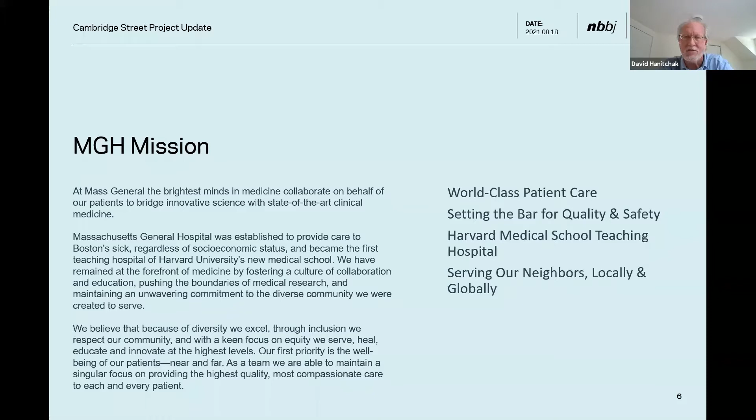MGH's mission is focused on clinical care, community care, research and teaching. We have a set of principles we follow, again focused on patients: how do we provide care, how do we use the building not just for specific occupants but to change care across the institution. Flexibility and adaptability are of key importance now that we are suddenly in a different respiratory disease type of world, and I can mention how some of our changes adapt to that. How do we improve the experience for our staff, and how do we try out new technologies? We also have to make it fiscally responsible, and I will touch on that as well.

The building planning started at least five years ago, though I've come across documents from 2013 suggesting we were thinking about it then, to deliver state-of-the-art care. We have increasing demand for care, and at the same time real capacity issues, particularly in the emergency department where we have frequent boarders. One reason is that we have 38% single beds in the hospital, and we are closing 30 to 60 head wall beds per day based on infection, gender, behavior, hospice, and any number of things. Plus we are working in some obsolete buildings providing care, and all of that needs to be upgraded.

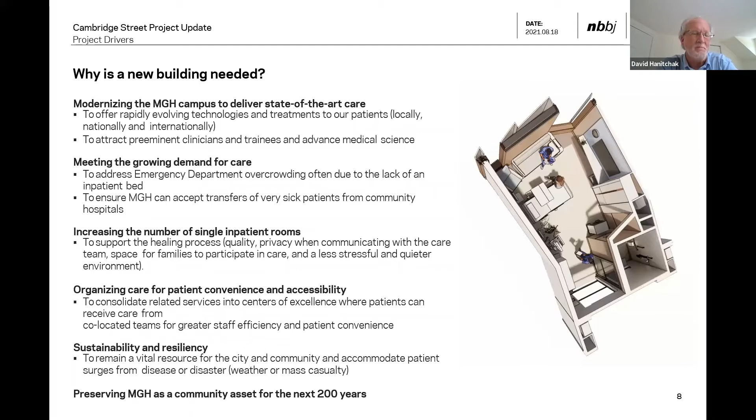More specifically, you can see our site on the left and an image encircled on the right. There are basically 2 blocks of a podium that I will describe in a moment, with 2 bed towers on top of that.

The buildings will be phased because we need to keep existing hospital operations ongoing. The site is right on Cambridge Street, if you know Boston, surrounded by North Grove, the main entry to the hospital, Parkman that runs along the north side, towards the upper left, and Blossom Street.

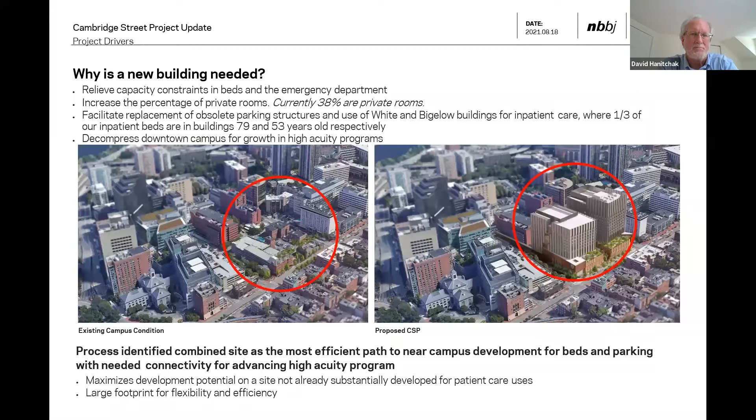So included in the building are 482 beds. That's a net new of 94, but the actual opportunity to not have to close 30 to 60 beds per day makes this more significant than it looks.

14 imaging modalities, 24 ORs, 120 exam rooms for cancer, plus 100 infusion bays.

We have full support services because the intent is that this building will be a place of refuge for the hospital if we are in a full disaster. It is set up to maintain 96 hours in island mode, and yet still be able to provide services both to the existing patients and any emergent patients that can make it to us at those times.

We also have a variety of needs that are directed by the city, including an MBTA head house for a planned Bowdoin Street to Charles Circle connector between 2 subway lines here.

We have 900 plus parking spaces, of which 175 are new. We are more than doubling our existing bike parking, and a variety of other services, both community, urban design, and hospital-based.

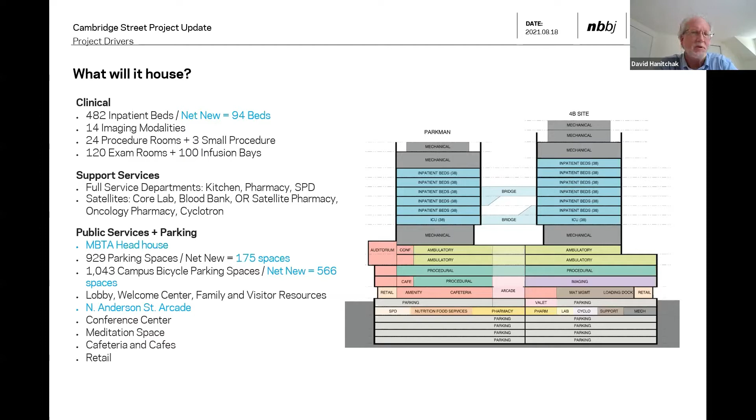And over the last several years that this project has been developed, we've had to slow up a bit. Part of the reason for that was COVID, and part of that was discussions with the community. We needed to consider what we would change based on what we've learned about the diseases we're likely to face in the future.

Given a variety of movements and the disease itself, what can we do with our commitment to public health equity and climate justice? And then how does that relate to resiliency and sustainability?

We have had a significant amount of dialogue with the community, state officials, neighborhood organizations. These are but some of the major ones. And frankly, everybody has a set of perfectly valid needs that we are trying to address.

Which brings us into one of our major challenges: how do we balance the goals and resources? I'll start by saying, obviously, we have the clinical drivers for the process and the severe capacity constraints.

We're replacing obsolete facilities, and we use this building to decompress programs currently within the hospital and to rationalize them so that they can expand the acute services within the hospital. At the same time, we are moving programs that can legitimately move off campus into neighborhoods, through other programs and other developments within our system.

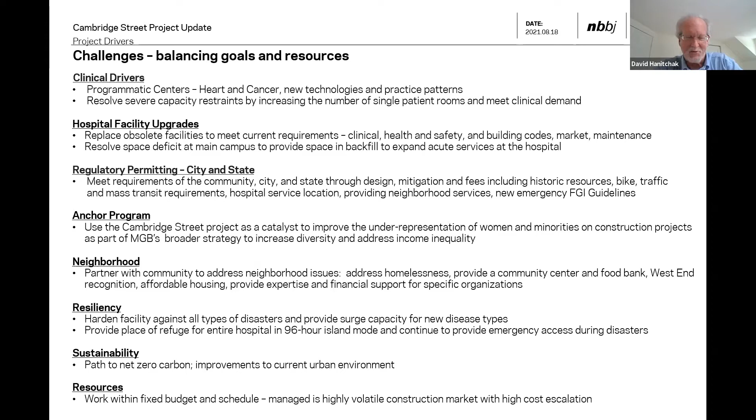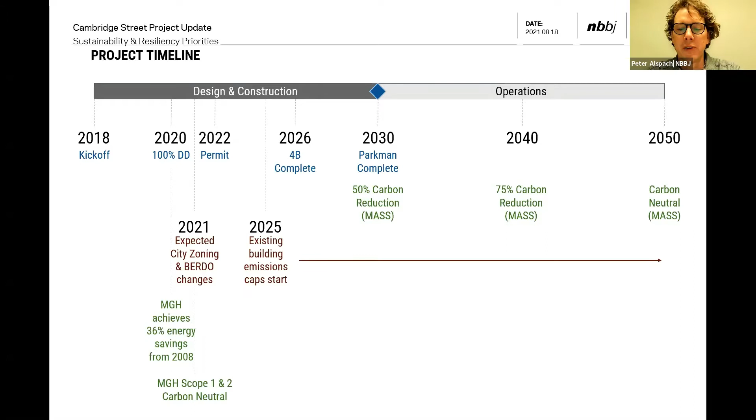So we wanted to talk about some of the sustainability and resiliency priorities first, and then we'll get into some of the more details around each of those topics.

I think one of the starting points for me is to look at the length of the project design and construction duration, as well as the expected length of the project's lifespan. I think that both of those have a significant influence on the drivers for the project and how we go about the process, especially around sustainability. We've got a 12+ year planning, design and construction process, and things change during that, and that is something we've had to be fairly nimble about, even during the design phase, looking forward out to 2030 and beyond, to make sure that our sustainability and resiliency goals for the project align with the kind of changing landscape, both regulatory and legislative, as well as the changing climate that is being projected out into the future.

I think one of the good things about projects that are kind of forced to take that long view is that it forces you into a mindset around sustainability and resiliency that sometimes quick burn projects don't take, because they're so focused on the near term.

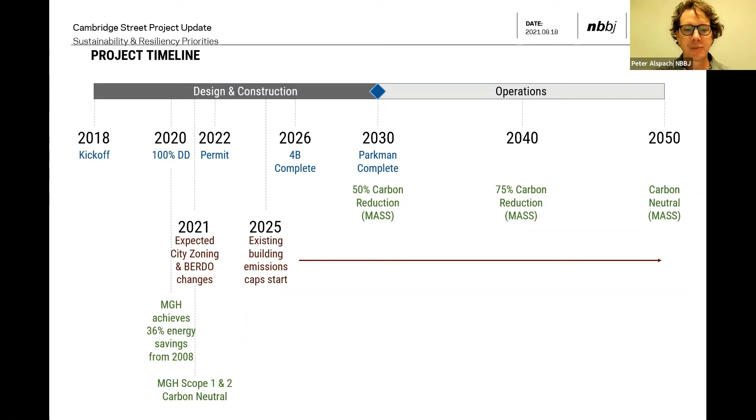When we look at resiliency, David mentioned the 96-hour island mode, and that's really driven by this mission to provide a community support system for the MGH community within the new Cambridge Street project. So as we started to look at that, we first looked at what are some of the disruptors that are out there. You'll see a lot of them are climatic disruptors, which is not surprising given the potential for climate change that we are seeing.

We then mapped those into threats, working with a number of experts to identify the threats, particularly climate change threats, but also seismic and, as David mentioned, blast and terrorism threats, and used that threat analysis to set design goals for the project around resiliency, with that ultimate end game being this 96-hour island mode operation, which is basically like if everything collapses around the building, perhaps literally, perhaps figuratively, the building can still remain up and running at reasonable functionality and capacity for at least 96 hours while contingency plans get put in place. And that provides a real island of support for the MGH community as well.

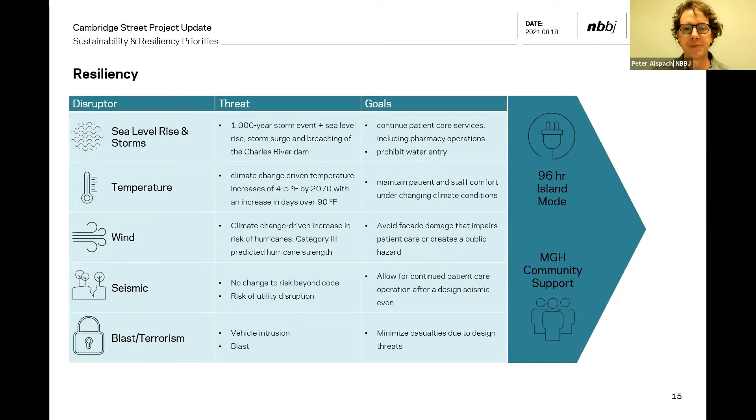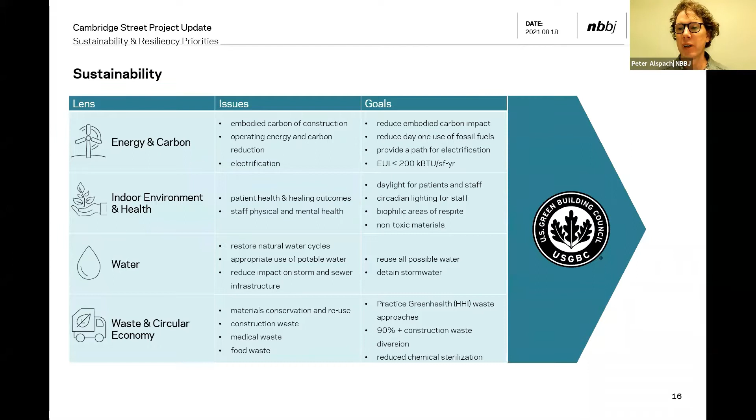Sustainability went through a similar process, looking instead at different lenses, as is the term we used as we started to initially charrette these ideas with the leadership at Massachusetts General Hospital, identifying energy and carbon, indoor environmental health, water and waste, and the circular economy as big lenses that then drove issues and goals for the project. Ultimately, sustainability kind of gets represented, for better or worse, through LEED certification. It's the most recognized certification out there in the world, and so something the project team is looking at to certify and bring some third-party rigor into how we're doing around sustainability in particular.

So doing a little bit deeper dive into resiliency, going into this 96-hour mode. When we talk about 96-hour goals, we have to start looking at all the different systems that are in place that support the hospital and setting goals for them, and then figuring out technical strategies to back that up. So we have to look at power and heat and cooling, how we get water, what we do with our waste, how we continue medical gas continuity and IT continuity, and how we deal with campus emergency operations.

These are all different things that go in, and then surge capacity is something I think that is important, because with the investment in this facility, we want to be able to accommodate additional patients under an emergency scenario from other buildings on campus that are less resilient than this one.

Some of the key things that I think are worth talking about around the resiliency performance are somewhat new to the campus, and some of them are new to hospitals, particularly in the Northeast region. We are providing multiple layers of backup heat.

So we have multiple steam connections for the project, which provides one layer of inherent resiliency. But we also have fuel oil boilers as a backup to the steam, because a seismic event or some other disruption may actually impact the ability of the hospital to receive steam. So we wanted to make sure we have a backup, kind of a backup for the backup, if you will.

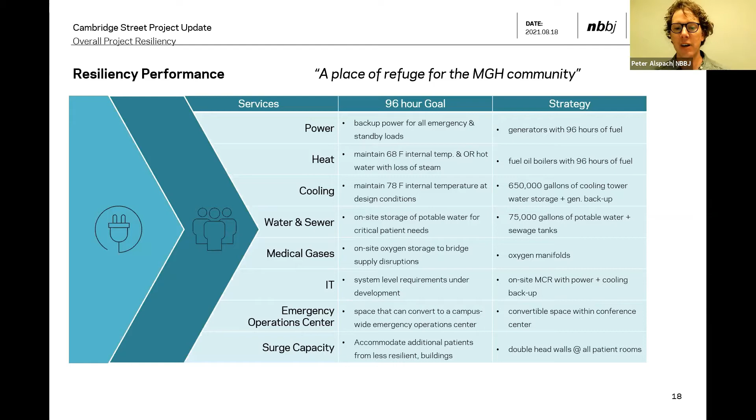As we talked about, there are a lot of climate drivers as well. Flood is one of the biggest climate change drivers that we looked at. It has a significant impact on this part of the campus. The design response has been to move out of the way whatever we can move out of the way. So the electrical infrastructure is not in the basement, it's elevated, so we don't have to worry about flood damage to electrical infrastructure.

And then the things we can't move, we do have a hardening approach to the facility to make sure we can keep the water out, whether it's keeping water out of the lobby or keeping water out of the below-grade pharmacy and parking garage, so that the pharmacy and food services can continue to operate in their location.

Temperature rise is something else we're seeing across the country this year in particular. We've actually used climate change projections to size the mechanical systems for the project. We've looked at the facade design to withstand the projected Category 3 hurricanes that may be coming.

Seismic is something that's not climate change driven, but is becoming more on the radar of the Northeast, despite the lack of it being seen as a typical seismic zone like California. And then the security upgrades—we are trying to keep those confidential, because you don't want to tell the enemy where your weaknesses are, and where your strengths are. So we're keeping that confidential, but there have been a number of upgrades on that front.

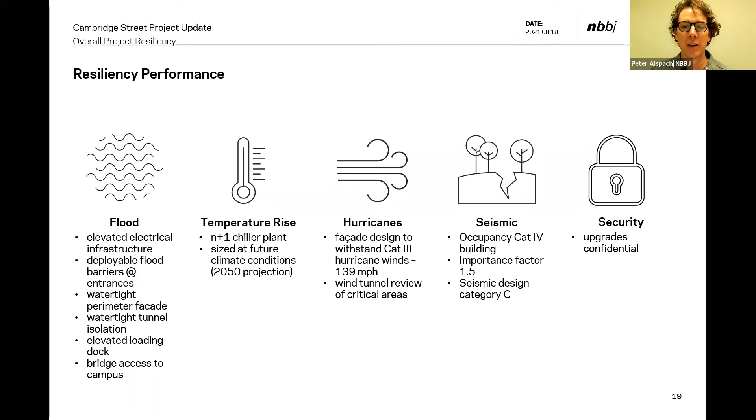Looking at the sustainability of the project, as I mentioned, LEED certification is part of the process. Right now we are heavily in the LEED Gold level, which is what we're viewing as the minimum certification level for the project. And we are striving for LEED Platinum certification.

As David mentioned, we're in design. There are still a lot of pieces moving around. So we are striving for LEED Platinum. We don't have a surefire path there, but we think we're going to be able to get there. So we're working our hardest to get to LEED Platinum.

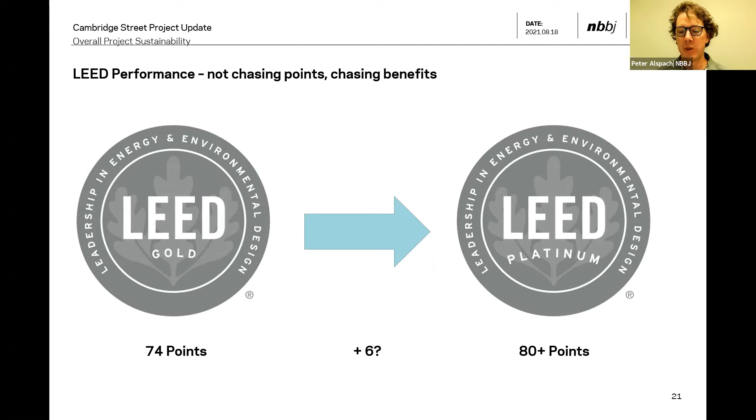Some of the areas we are looking at—we've got a little bit of opportunity on the water side, but most of the opportunity to move the project upwards around sustainability is related to energy, in particular renewable energy supply at the MGH system level, the materials of the project and how we can reduce the embodied carbon of construction, which I'll get into a little bit later, and also the indoor environmental quality.

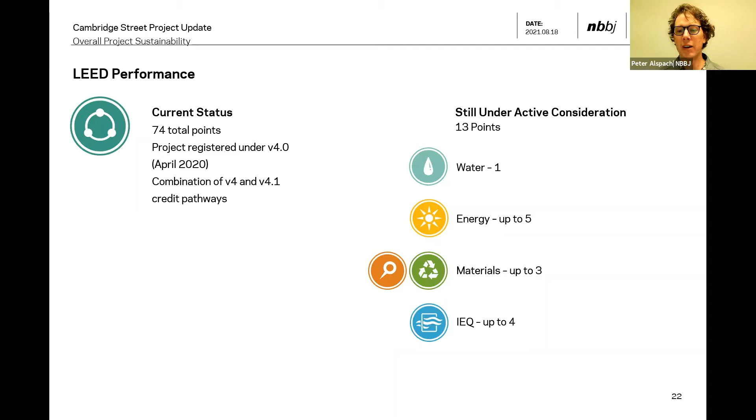So I wanted to do a deep dive into carbon here in particular. I know it's a very hot topic. The IPCC new report just came out, really emphasizing the criticality of the situation. I actually live in Seattle, on the West Coast, and we are in the thick of climate change driven events right now as well.

I do think it's worth stepping back from the project a little bit and talking about what MGH has achieved to date. MGH set a goal of reducing energy consumption at a campus level by 25% by 2020. MGH has vastly exceeded that goal. I think MGH hit that goal in 2013 or so, and is now at a 36% reduction from 2008 levels, which is really fantastic.

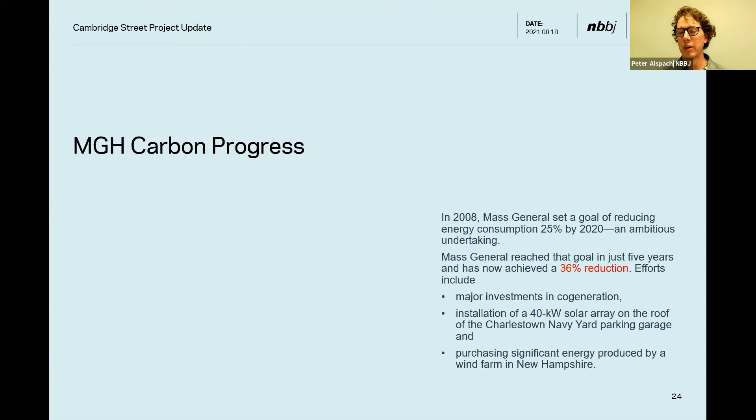It means there's a lot of work being done at the whole campus level, not just looking at new construction, because there's a lot of existing energy and operations that are being really optimized and fine-tuned as the campus moves forward.

So when we look at new construction projects, we break carbon into two buckets. One is embodied carbon. Embodied carbon is the carbon emitted as part of the construction of the building, so the concrete and the steel and the aluminum and the insulation and all the materials that go into the construction of the building. Those all require carbon to make them, to move them onto the site, and to actually build them. So that's the embodied carbon.

And then operational carbon, we generally in the new building world are really just looking at the energy consuming systems of the building. So when we talk about operational carbon, we're not going to get into waste and material supplies and some of those things. They are important, but for this discussion we're just going to focus on the energy systems and how we get those to a zero carbon state as well.

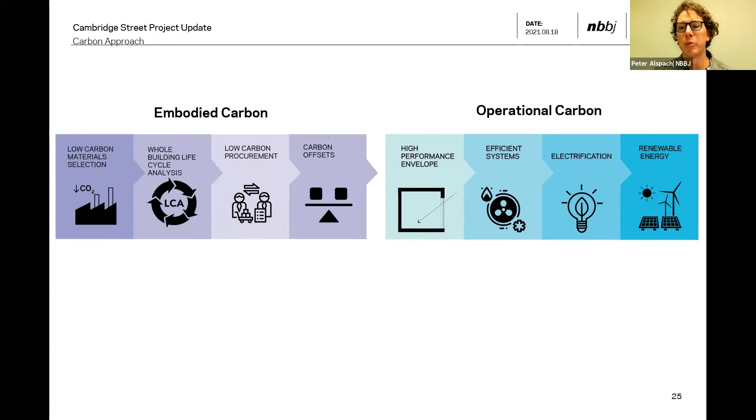I'm actually going to start with the operational carbon. It's the carbon that I think most people think of when they think about carbon emissions from buildings. And we take kind of a 4-step process when we look at it.

Number one is we start with a high performance envelope, reducing the loads that are imposed on the energy systems of the building. The environmental loads are one of the predominant drivers of energy consumption within buildings. Keeping the heat out and everything is really important. And then looking at how those systems are put together to use that energy responsibly.

And then we look at something called electrification, which is we're trying to use electricity as much as we can, because the state in particular is looking at 100% renewable energy supply by 2050 for the electrical grid. So if we shift loads to electricity now, as the electrical grid gets cleaner over time, the carbon footprint of those loads goes down with the electrical grid. And that's one of the biggest drivers around the project energy systems design.

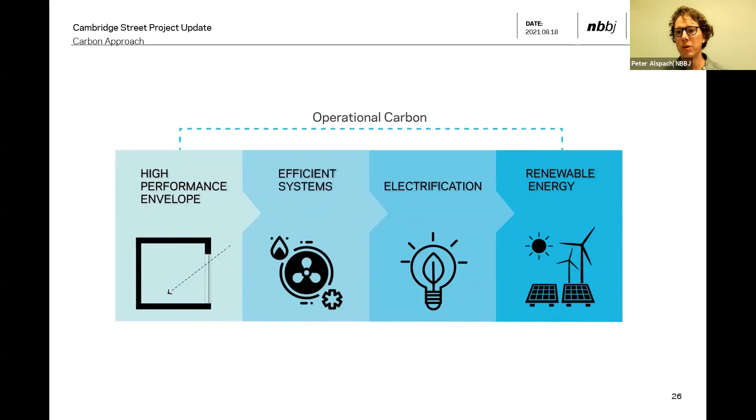It's a somewhat new concept within building design, and I think it's an important concept to get our heads around. And what it does is it leads to that last step of decarbonization, which is the supply of renewable energy. That can be done on-site or off-site.

When we look at how energy is used in hospitals, I think it's important to look at how energy is currently being used in hospitals. So this is a fuel mix survey for Boston area hospitals that shows that right now about 60% of the total energy being consumed in hospitals is fossil fuel driven, a combination of direct natural gas use and steam consumption, and about 40% is derived from electricity. That has a significant carbon footprint because that 60% is coming from fossil fuels, and we're trying to divest ourselves from fossil fuels as much as we can.

The current design of the Cambridge Street project is 85% electric and 15% steam, which is, I think, an amazing transition from the status quo, which we see here on this chart.

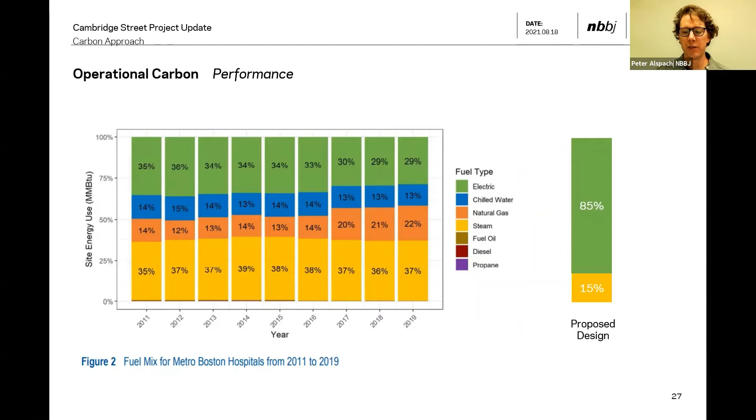When we also look at energy, we in the energy world use an acronym called EUI, which is energy use intensity, the amount of energy consumed per square foot of the building per year. It's given in units of 1,000 BTUs, kBTUs per square foot per year. It's kind of a wonky energy metric that's unique to America. For those of you that might be outside of America, I apologize for the use of English units, but that's where we are.

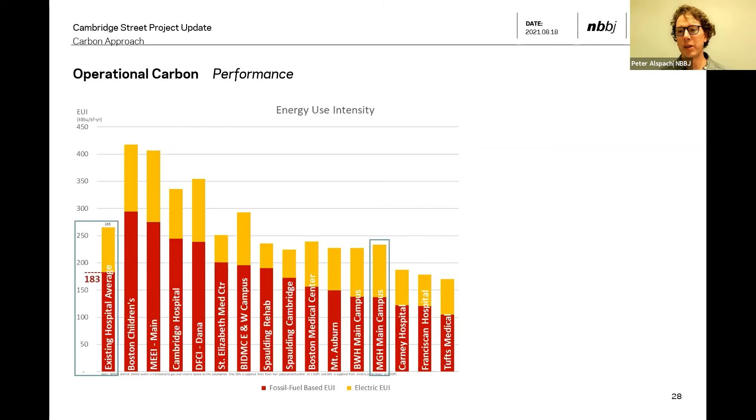The current average for existing hospitals in the Boston area is about 265 kBTU per square foot per year, and of that, about 183 is derived directly from fossil fuels. Mass General's main campus is lower than that: the energy use intensity is about 240, with about 140 of that coming from fossil fuel loads. And when we look at the new building design, the new building energy use intensity is 173, so a pretty significant reduction from that average, and even the average of the campus, but it's also a 25% reduction versus the current energy code.

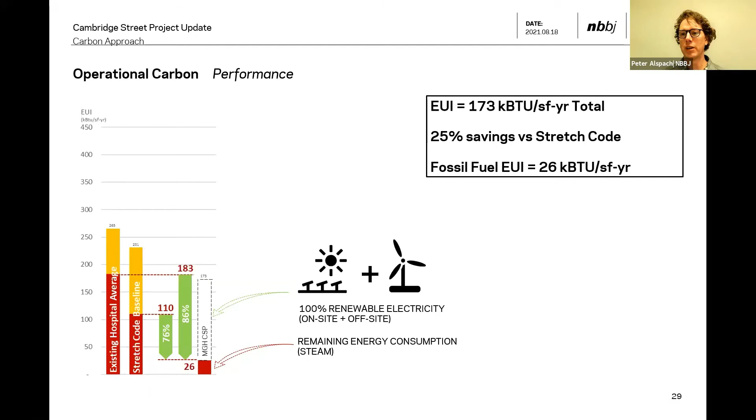And when we look at the shift to electrification, what that means is that we take that 85% that is electric, and with 100% renewable electricity generated both on-site and off-site, we can reduce that real energy footprint down to just 26 kBTU per square foot per year, which is just about 1/10 of the average for an existing hospital, which is really just a fantastic achievement in my opinion. So how do we get there?

Well, as I mentioned, we start with this high performance envelope. Windows are the weak link in most building envelopes.

Glass is something used in cookware. It's not something used in insulation products, right? So we want to keep the window to wall ratio low, the amount of glass in the building low. And where we do have glass, we want it to be high performance glass.

So we've got triple pane glazing throughout the project. And we've also paid particular attention to how the building is constructed in terms of keeping an airtight envelope. Air leakage not only causes energy to leak in and out, but also can cause moisture problems in a building, which can lead to condensation and mold growth and all kinds of bad health outcomes. So an airtight envelope is incredibly important and part of this high performance envelope.

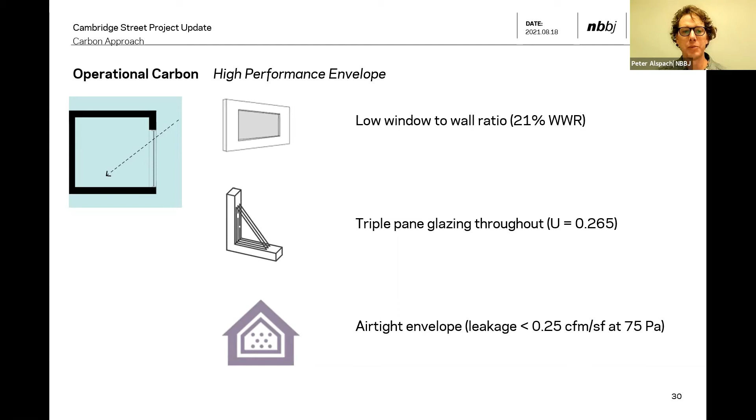When we look at the systems, we've got a very advanced chiller plant generating the cooling. And we're even looking at the refrigerants, the global warming potential of the refrigerants. Refrigerants used in air conditioning systems can have very, very high global warming potential. We're using refrigerants that have a very, very low global warming potential, which represents a really significant savings.

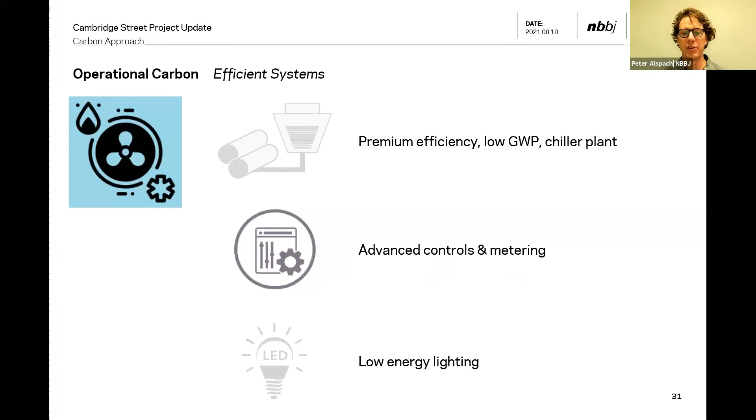And then advanced controls and metering and very efficient lighting are some of the key things. But I want to really focus on this electrification. One thing that I think is small but significant is that we've gotten natural gas completely out of the project.

So cooking for this project will be done on induction cooking facilities. That gets natural gas consumption out of the project and electrifies and allows for a renewable energy supply of the cooking. But it also improves the health of the workers in the kitchen because we don't have those fumes coming out into the kitchen. It improves the comfort of the kitchens as well - there's a lot less waste heat given off. So there are a lot of small but significant wins around the electrification of cooking systems.

But we've got this big system in here that is pulling heat out of the exhaust air of the building. Buildings breathe, right? We're constantly pulling air into buildings and exhausting air out to keep a healthy environment inside for the patients and staff. And all that air we're throwing out of the building is being exhausted between 70 and 75 degrees, so it actually becomes a really great heat source for us to capture.

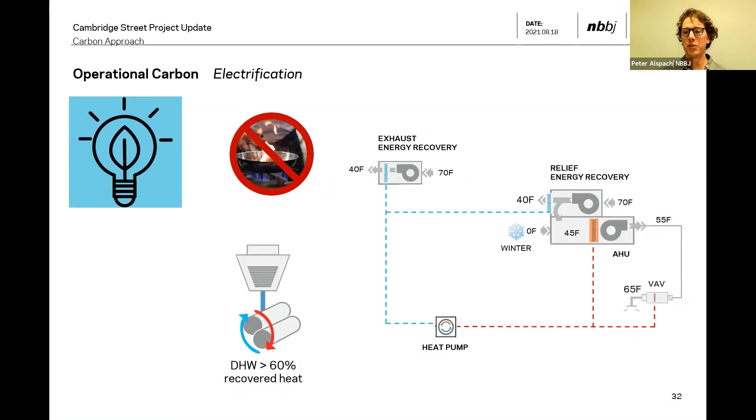So we're capturing all of that heat from the exhaust air, running it through a heat pump like you might have in a geothermal heat pump, and using that to both heat domestic hot water that comes out of the tap, as well as provide heat for the air coming into the building. It's really dropped the heating demand of the project significantly - that's the number one driver that's allowed us to increase electrification and drop steam usage.

So much so that, if we look at this graph, the red and the pink are the only times of the year where we're using steam. We've eliminated steam usage except for these very, very cold event days where we can't recover enough heat to heat the building. We also have steam for humidification and process, which is the light pink - and those needs are driven by health and safety for the project.

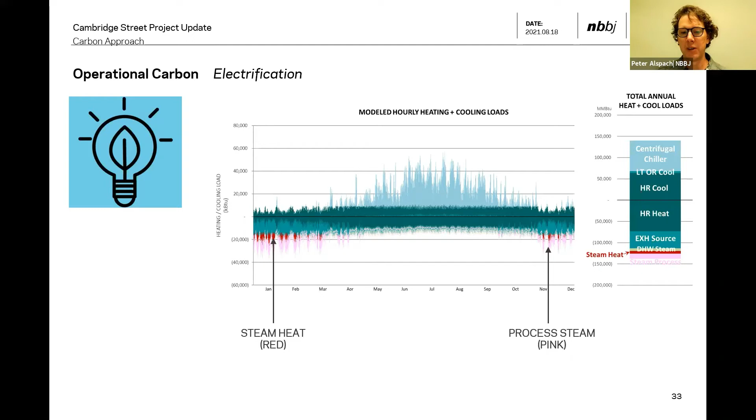When we talk about electrification as well, we think about steam. Steam right now is fossil fuel derived, but as we go forward in time, the steam utilities are looking at how they can electrify and reduce their carbon footprint. One advantage of hooking up to a district energy system like we have for steam is that we can take advantage, along with all of the other customers, of upgrades to the central infrastructure of those district systems. That's an important part of the decarbonization of not just this project, but also the entire MGH campus.

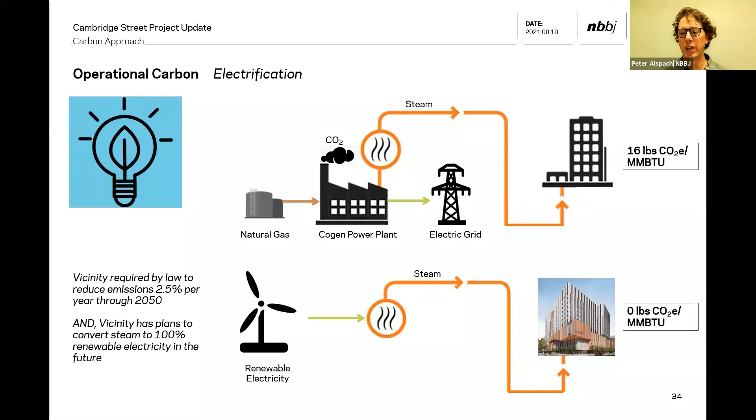And then lastly, it comes down to renewable energy. We are putting on a modest on-site rooftop solar array where we can. We have a lot of mechanical equipment on top of the roofs, and the lower roofs are all reserved for patients, so we don't want to put solar panels where we want to get patients and staff outside onto roof decks and roof gardens. So there's a commitment to renewable energy from off-site sources. Right now, MGH is looking at how to procure that renewable energy for the future.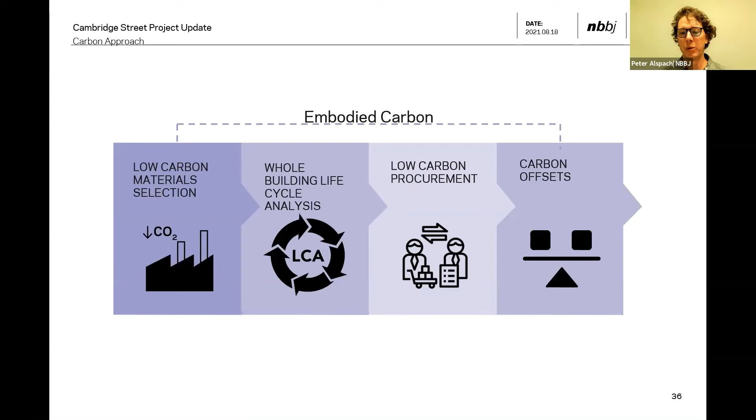When we look at embodied carbon, this is about how the building gets built. We're looking at a four-step process: low carbon materials selection, selecting the right materials to begin with, taking a life cycle analysis view of materials in the project, then looking at low carbon procurement—how we actually buy stuff is very important and can have a huge impact on the carbon footprint of the project. Lastly, there are carbon offsets we'd need to get to a zero carbon scenario for embodied carbon.

Looking at the magnitude of embodied carbon right now for the project, our contractor took a look at our current design, just the structure and facade, which is the majority of the embodied carbon. We're at 372 kilograms of CO2 equivalent per square meter of the project, though that's of some limited scopes. When we take a comprehensive view for the project, we're probably going to end up around 560 to 620 kilograms of CO2 per square meter, driven a lot by steel and concrete—concrete is number one and steel is number two sources of carbon.

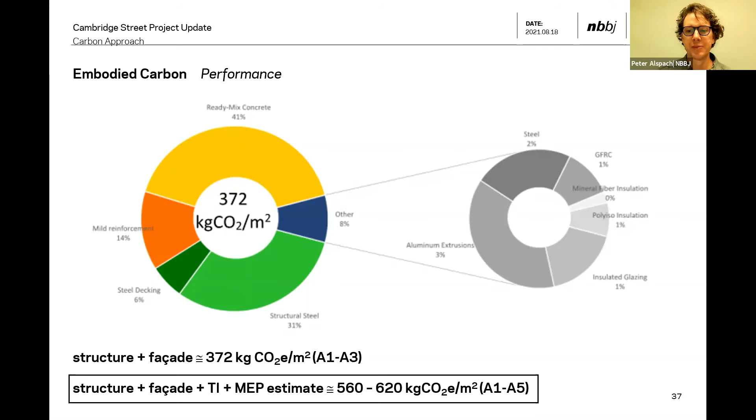When we look at low material selection, we've got a number of tools we can use to start looking at things. We focus obviously on concrete and steel, but also look at finish materials and things like insulation. Most insulation is blown with gases, and those gases can have greenhouse gas potential, so we can look at low carbon insulation products as well. Making smart choices at the beginning sets the stage for the later parts.

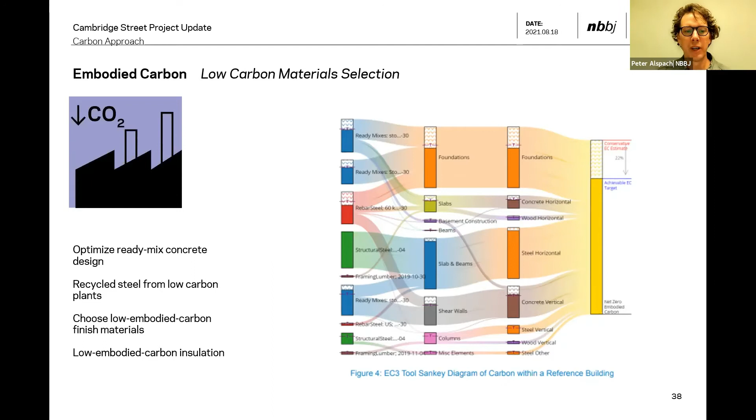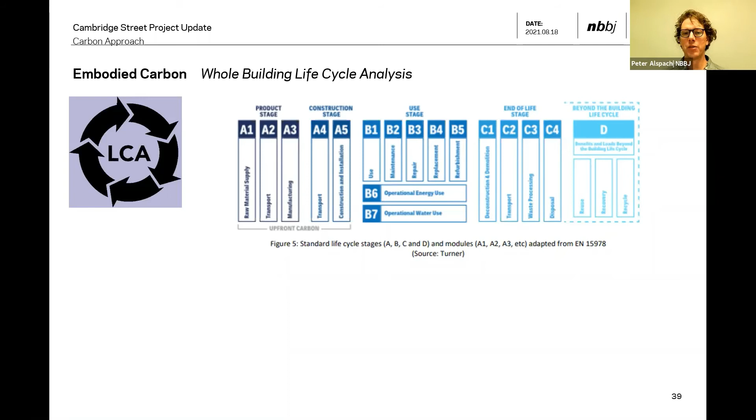So what is whole building life cycle analysis? It takes an analytic view of the entire life cycle of the building itself—the carbon that goes into initial construction, but also how those materials need to be repaired, replaced, and maintained over time, and what happens to them at the end of their lives. Are they just a landfill product? Do they decompose in the landfill and emit methane? Can they be recycled or recovered? These are all parts of a whole building life cycle analysis.

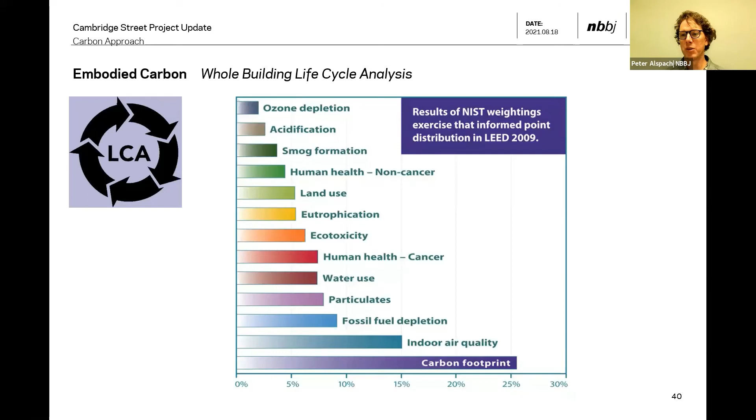Whole building life cycle analyses also look at things beyond just the carbon footprint—the impact on air quality, on ozone depletion, on eutrophication, and on the toxicity to humans and the environment of all these different materials. It's a very comprehensive, long view that lets us make smart decisions. That's really the point of this type of analysis, to get the data in so you can make smart choices to help reduce the footprint.

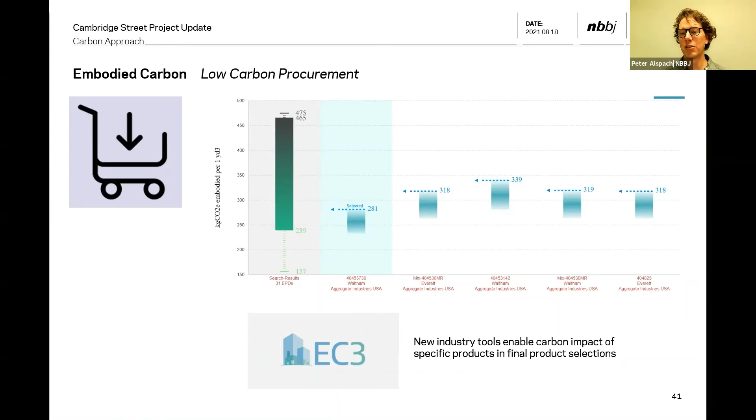Lastly, there's the procurement side, which is relatively new in the industry—it's been going on for just a few years. Some industry trade groups and university research groups have partnered up to look at how we can get data on the embodied carbon of materials. Once you've got that data, you can select the best providers of the same performance. For a 3000 PSI concrete mix, you can compare the embodied carbon of three different bidding suppliers and choose based not just on price but also carbon performance, driving the market toward low carbon solutions—considering not just the initial material but who is providing it and where it's coming from. Is it being trucked across the country or is it local? All these things go into that.

When we put this all together from a carbon perspective, these are pretty rough numbers—there's a lot of moving parts, especially around the steam emissions in the city of Boston. But looking at a baseline building versus the proposed building, we're looking at about a 65% life cycle carbon emissions reduction going out to 2050, which I think is really phenomenal for this project. I think we can even do better when we see more savings realized on the embodied side, but we won't see those until the procurement is done.

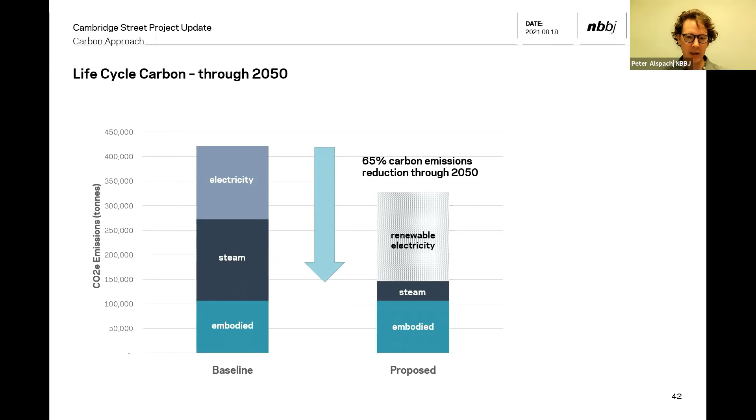With that, I want to wrap up and leave enough time for questions, because we've just skimmed the surface on a lot of topics, and I know there are probably a number of questions out there, so we want to leave time for that.